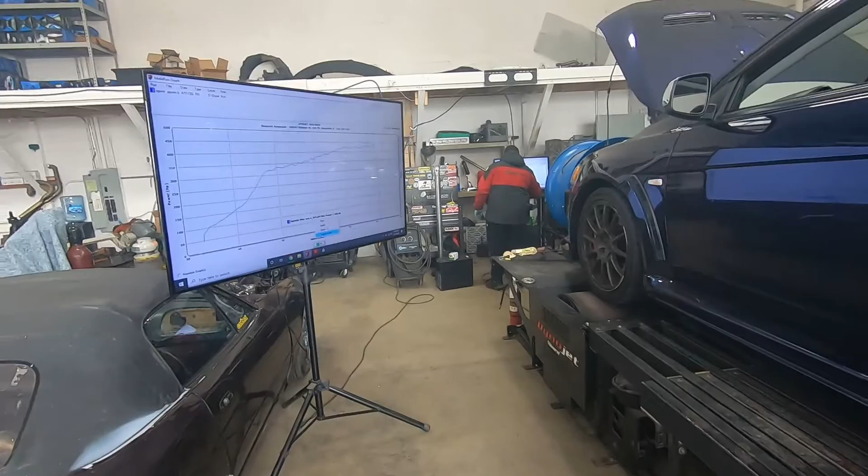So after we tuned the 93, as you can see, we made like 430 something. And this was straight 93, low boost, like 25, 27 pounds or something like that. We have to drain the fuel. Now, an Evo X doesn't have a drain plug. You literally gotta feng shui some things and get it out.

We usually use the drain on the return line and turn a pump on, or hold cancel on the steering wheel for the cruise control. That usually primes the pump and you can get it out that way. Once you've drained it, I like to do E98 to begin, because that's the highest form of ethanol you can buy. And we start with that.

We usually start with the high content. Now, typically, if I had my way, I would put a tank of E85, whatever you can buy, and then tune on the second tank, not the first, because you're still getting 93 mixture out. The second tank will usually be higher.

So say you got your high content ethanol in your fuel tank, and you're ready to tune. You're still not turning any of the flex fuel stuff on. I don't do that. You're using alternate map 1. So the regular high octane fuel and all this timing stuff is for your 93. And then alternate map 1 is going to be for your highest ethanol content you can get.

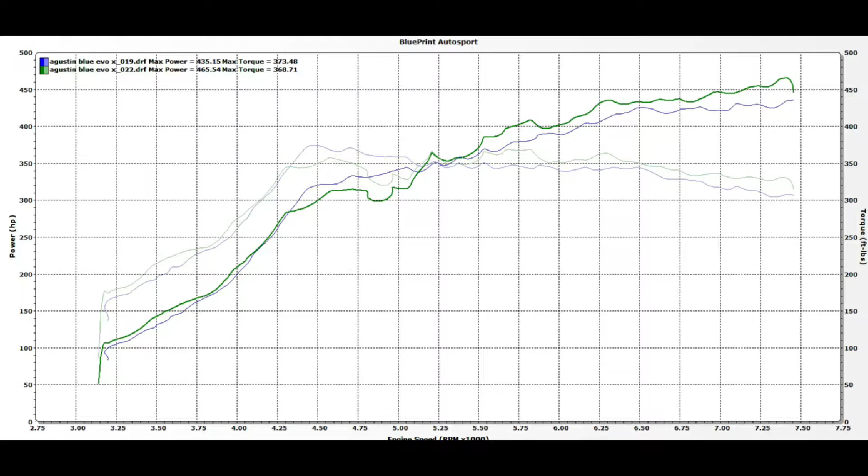All right, so we made 2 pulls, and we made like what, 466. But as you can see, after 2 pulls, it's already gone down to 76%. So usually I like to do it on the second tank, but this is the reason why I'm using E98 to do the E85 ethanol part of the tune. All right.

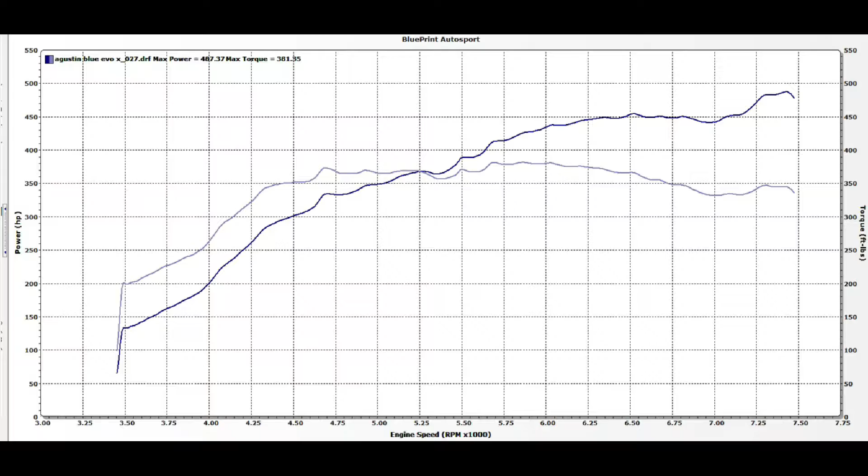All right, so on that last run, we made 486 and 380. The torque is getting up there. I don't know how I feel about that, but we're gonna see what we can do. Also, the mix has gone to 72%, and anything below 75, I don't want to really push it.

So he's adding more fuel. Let's see what we can do about the percentages. If not, then we're gonna keep it at this, and then we're just going to mix all the fuels in to get all the different steps, make sure the computer is adjusting for the different mixtures of fuel.

All right, so that went pretty good, I think. What do you make, like 487 or something like that on 32 pounds of boost. The customer is very happy. But I think we ended with like 75%, because as I was saying, this was kind of mixed. And as we did more pulls, the mixture got even less ethanol content, and that's why I always do E98.

If it was my car, I would personally want to do a second tank, but this works. Either way, so we made 480 whatever. That's the highest level we're going to see, but now we need to turn on the flex fuel. So if you come in here, you would think you'll just turn it on. No, there's more things that need to be done.

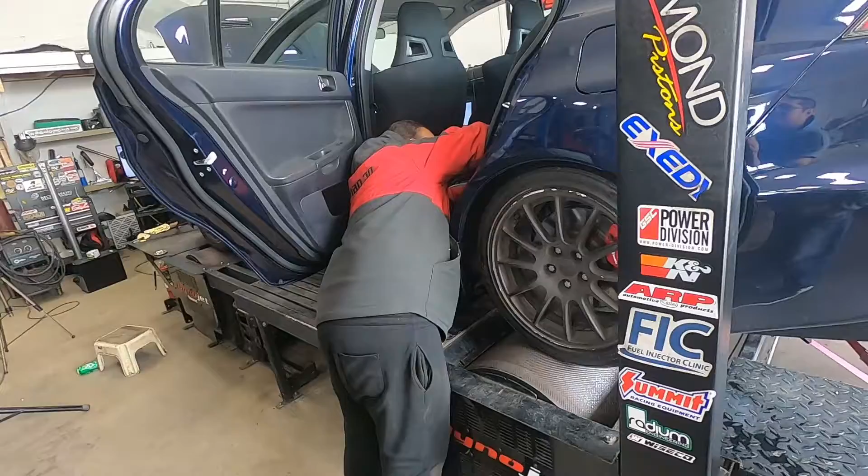It's like fat fingers. All right, so we're draining some fuel to get the lower E content down. Let's see if the computer listens to us, lowering the boost, lowering the timing, lowering everything according to the ethanol content. That's the whole point of flex. So, just like releasing the pressure.

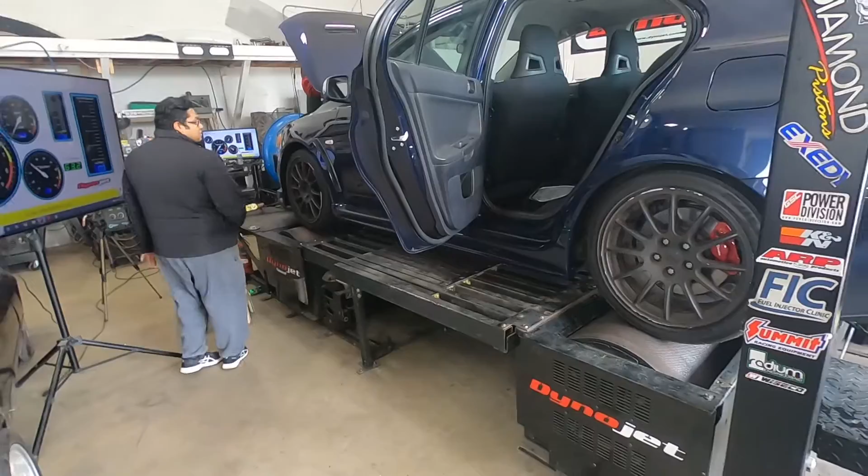So unfortunately, the Evo X doesn't have a drain on the bottom at the back. So we literally gotta jump the pump and then take it out from the return line of the rail. Typically, we would just use the steering wheel, press cancel on the cruise button, and it'll prime the pump. But he doesn't have that. Let me show you what he got. He doesn't have a stock steering wheel, so you gotta do that bullshit.

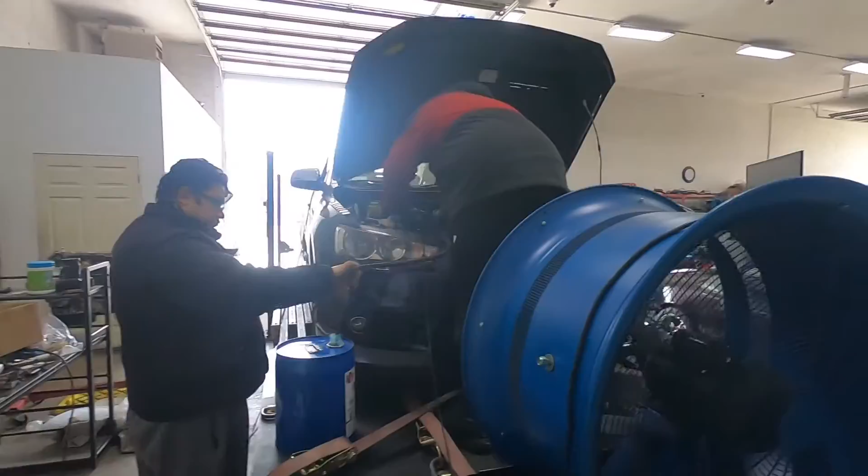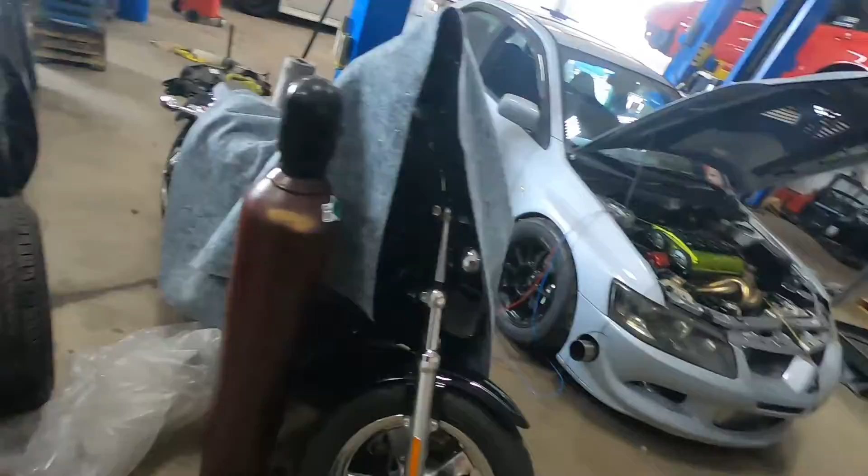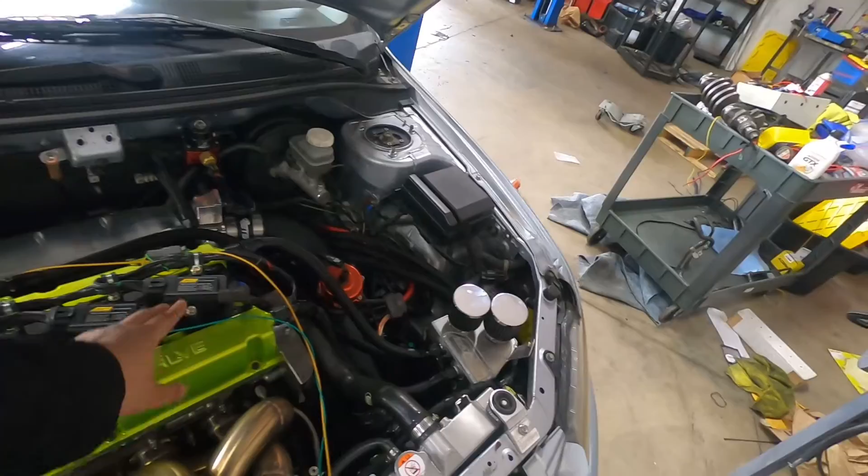So this Quicksilver project, that's not it. Right now we're fitting some signal wires for cylinder 3 and 4 into this from our ECU, from the Infinity, because we want to go sequential. That'll give each one of these coils a little bit more energy and makes everything a lot easier. It's also better for knock detection and knock deterrent.

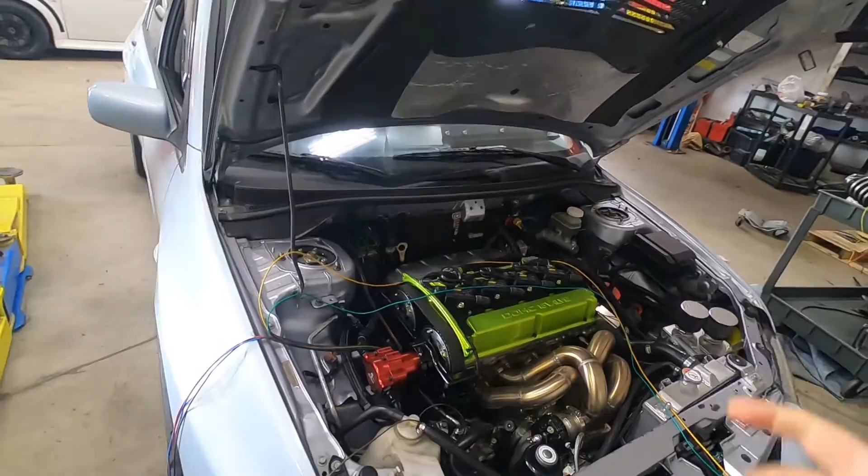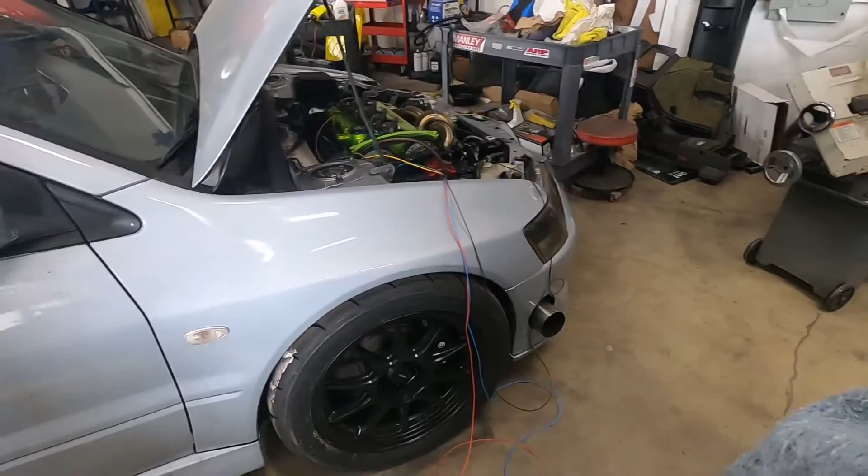After this, we're gonna basically tune it on 93 just to break the motor in and go balls out. So we're almost done. Just a few final touches here and there, and that's about it. We added the cutout for the exhaust. I think the car looks good. Always loved Evos because of the meanness of the car. Also, the headlights need to be basically cleaned out. Wow, that's pretty bad. Yep.

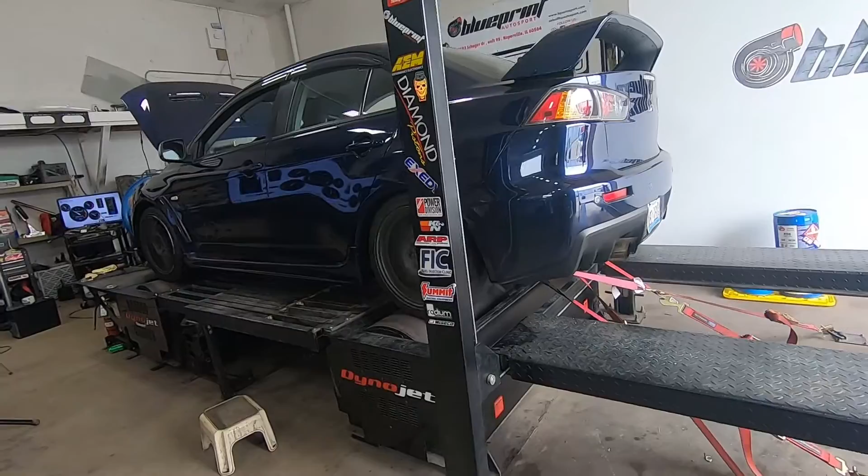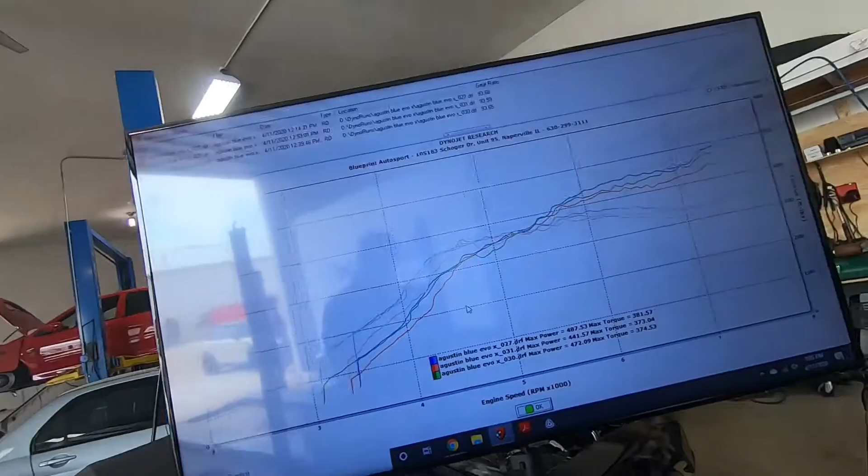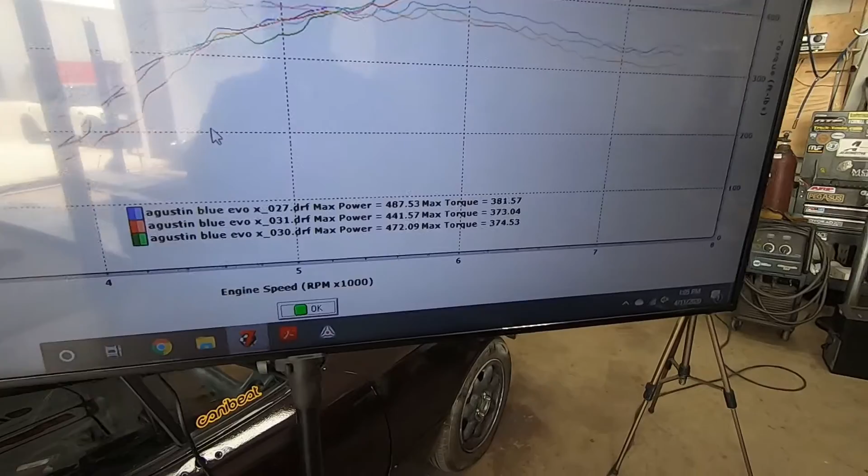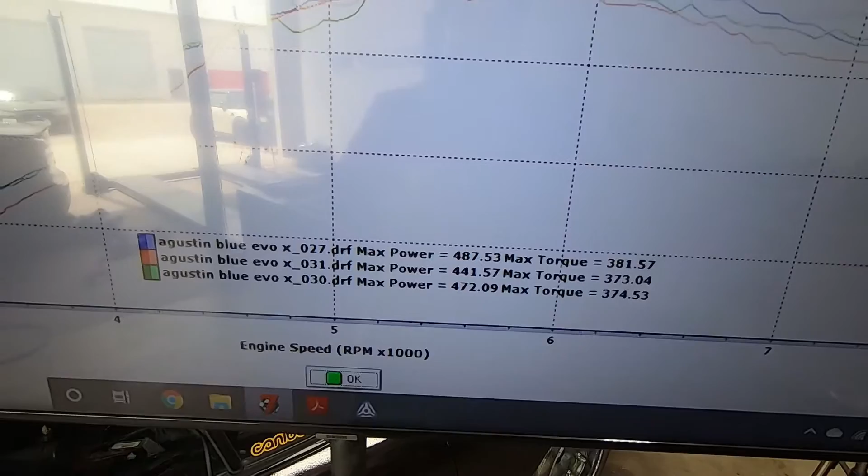So we just finished tuning. I just took it out for a spin, make sure everything is all right. I got it down to like 38% ethanol with fuel changes. Did a few runs. It's making 487 at 76% to 99% ethanol. I'm sorry, it's making 472 at like 65 to 68%, and it's making 441 at like high 30s.

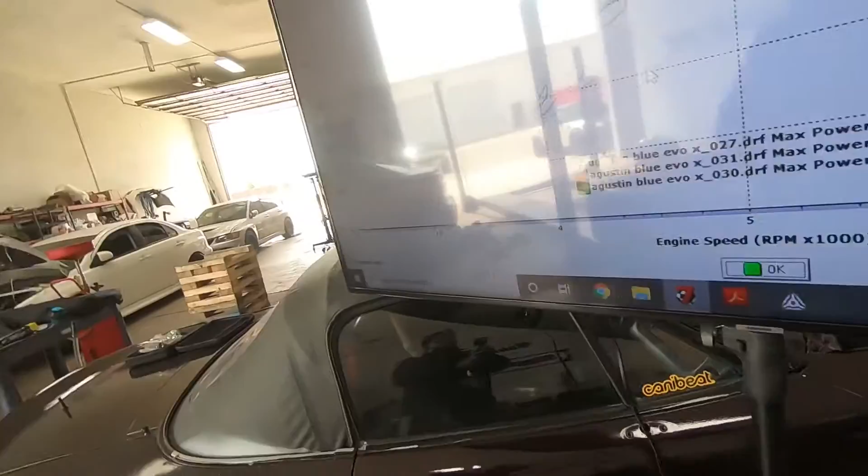So overall, it's a good car, stock car. It has a GTX 3071 or 76, I forget. I'm running around 32 pounds of boost at high end, and at low end I'm running 25 to 27 pounds. The car is completely stock, no cams, no nothing, just exhaust and a few things. But overall I think it came out pretty okay. Customer's happy, that's all that matters.

I'm gonna try to see what I can get done in my car ASAP, because it's been sitting for a few weeks now. Right now we broke it in a little bit, but once you start the car and drive around and those cylinder walls cut, you got to break it in quick. Seat those rings and make sure the rings take the shape of the cylinders. Otherwise, they get glazed and stuff like that. So I'm kind of anxious to get the car going.